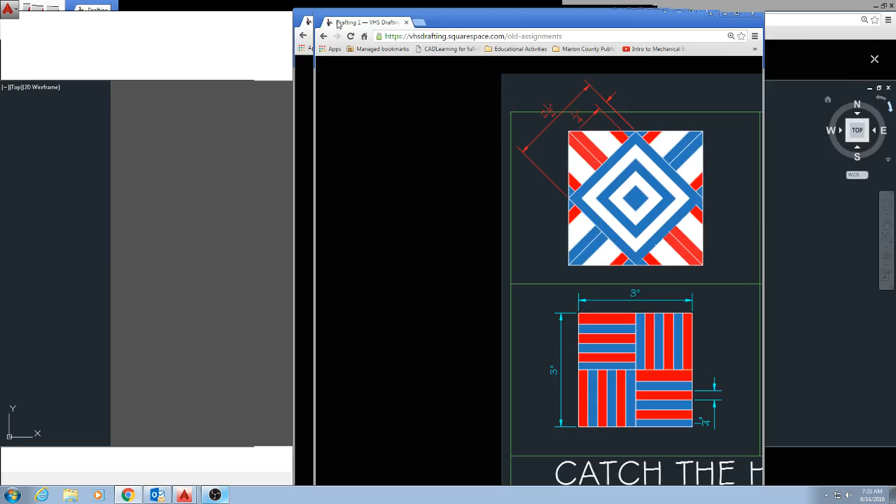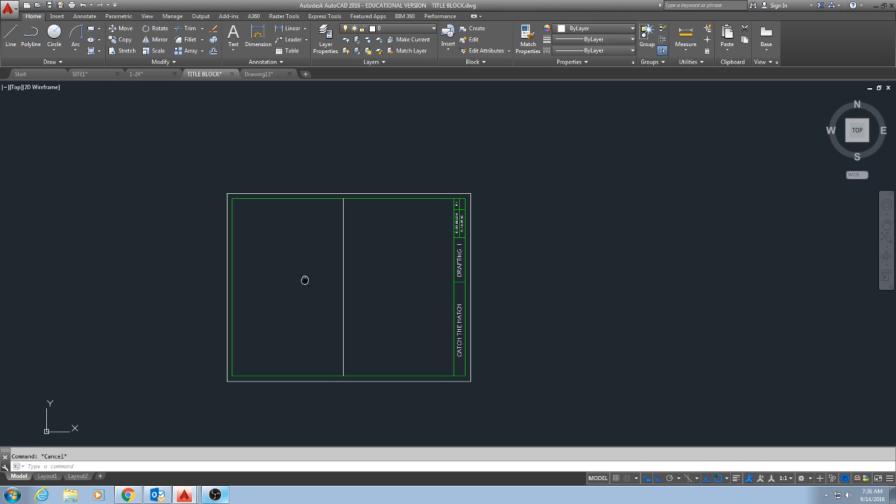I'm going to pull this to the other screen. First I need to divide my border into 4 sections. I'll click my green line on top and slide it over so I can cut my drawing space perfectly in half using midpoint. I'll draw a line straight down and trim it off, then reconnect this. And I'll do the same from the left, go to the midpoint straight over to there.

Let's see, you can use match properties. That's a new tool. Match properties allows you to take the properties of one line and apply it to other lines, so you can easily change colors and properties, stuff like that.

Okay, starting in the top left corner, the drawing tells me that I have a diamond shape that's 2.5 on each side.

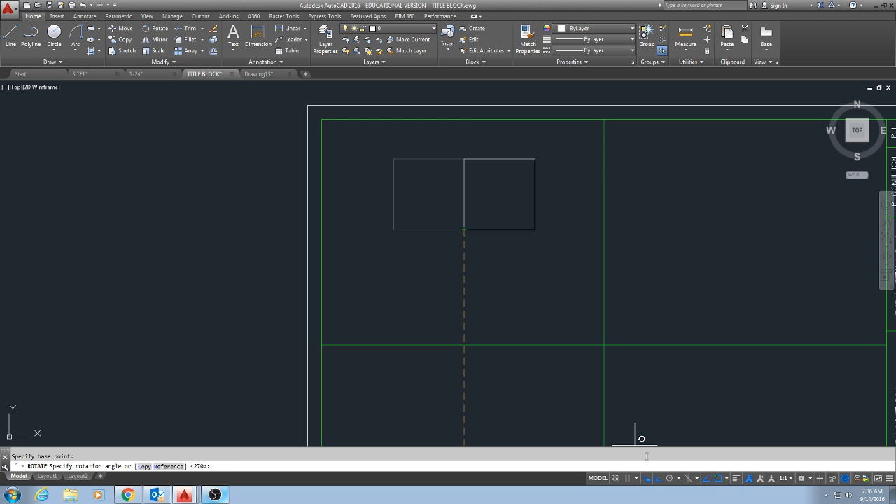So I'm going to start by drawing a 2.5 by 2.5 box, and then rotate it 45 degrees, so we've learned rotate. I'm going to rotate it from this base point, turn ortho off, and I need it to go basically into a diamond shape like that. So I've got a square and I need it to go there. If I went all the way to there, that would be a 90-degree rotation, so I want to go half that distance. When it says specify rotation angle, you can just type in how far you want to rotate it in degrees. So here I'll just type 45, enter, and it actually rotated it to the left, not the right, but it's okay, it's still the same thing.

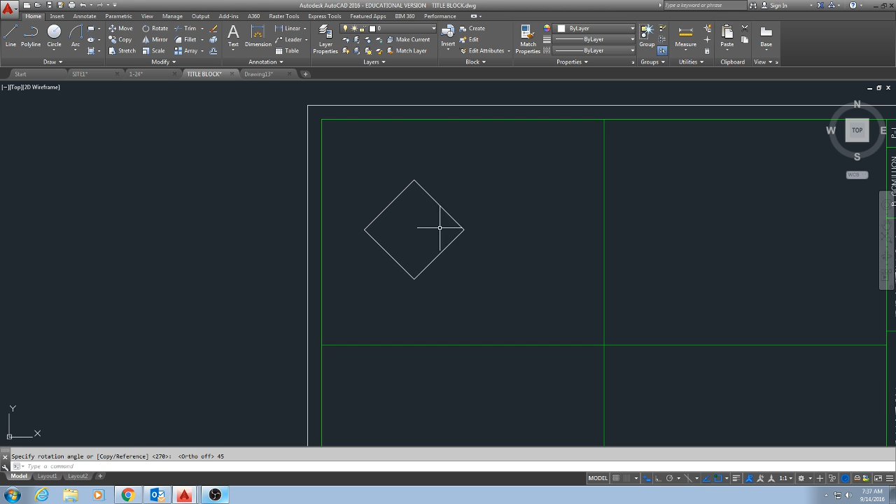Alright, so there's my diamond shape, and then there's a box surrounding the diamond shape. I don't know how big this box is, but I know it has to basically touch this diamond. So I'm going to draw a box like this, and then extend these lines so they're a little longer. Like that, and then TR, enter, and trim the corners.

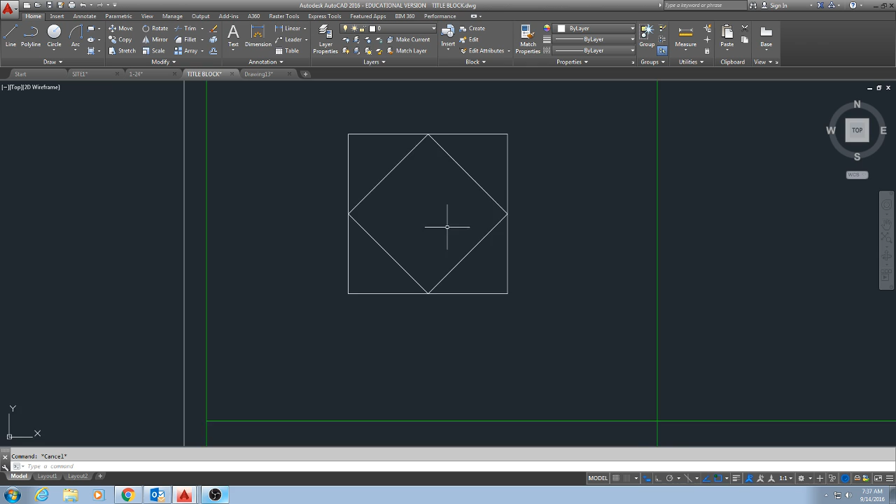Okay, and then you have offsets of 1/4 of an inch of this diamond going in. So I'm going to hit the offset tool, 0.25 is 1/4, and then I'm going to come in, and I can keep coming in.

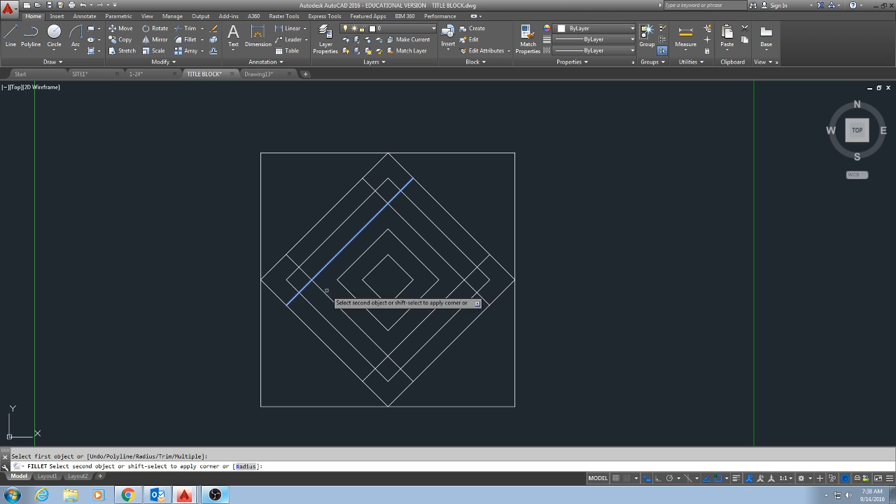Hopefully it doesn't get too confusing for me to trim it. We'll see. I'm going to use the fillet tool, which is here, and just fillet the outside. Then I'm going to the inside because it's easier for me to see. I'm just doing fillet over and over—you just got to make sure you click the right lines, just the lines that go together.

Alright, and then we get a shape that looks something like that. And then there are lines that come from the corner to the midpoint like this on each corner, and those also have an offset of 1/4 of an inch, so I'm going to offset those.

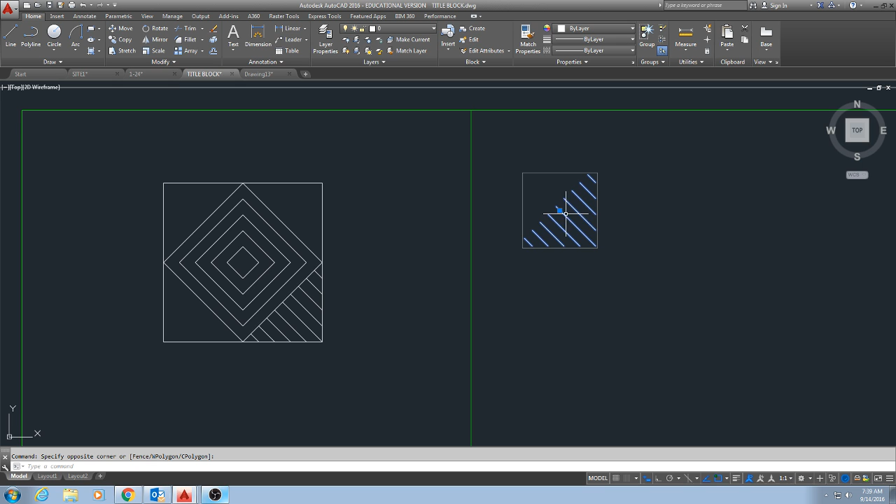And trim. Actually, I need to do that for all 4 corners, but what I'm going to do is use copy paste. So I'm going to select all these lines down here. Control C for copy, and then Control V for paste. And I'm going to group these by right clicking and going to group. Now they're all together, and I can use the rotate tool with ortho on and just rotate them whichever way I need them.

And then copy them over to there. Now that I have them here, here's a new tool, mirror. Actually, I need to group these together as well—I guess I don't really need to, but let's see if I can. Group, group, so now I have 2 groups. I'm going to click both of these and then use the mirror tool up here.

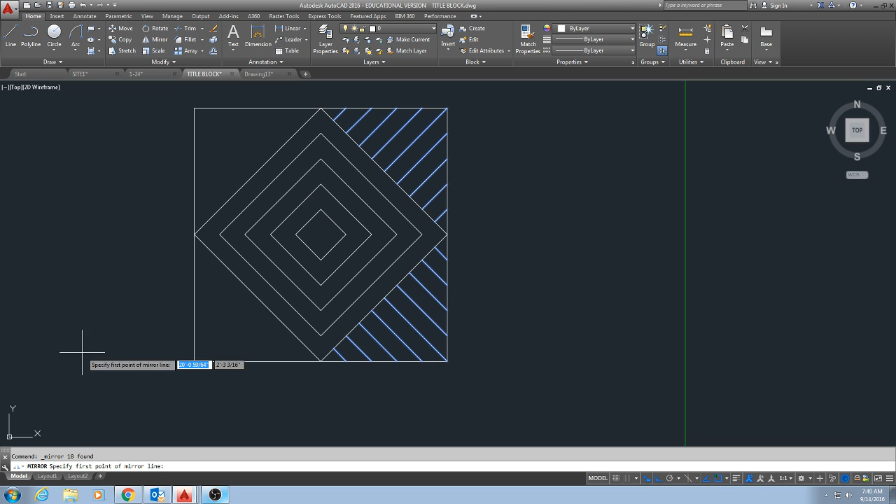It'll say specify first point of mirror line. That's going to be the top of my diamond, and then the second point will be the bottom of my diamond. Erase source objects, no. And now my pattern is complete.

Okay, that looks good, and then I just have to hatch the colors. So the hatch tool is here, solid. Let's find a nice blue and just gotta follow what the website says here for the colors. So there's that, that, and that, and then these two, these two.

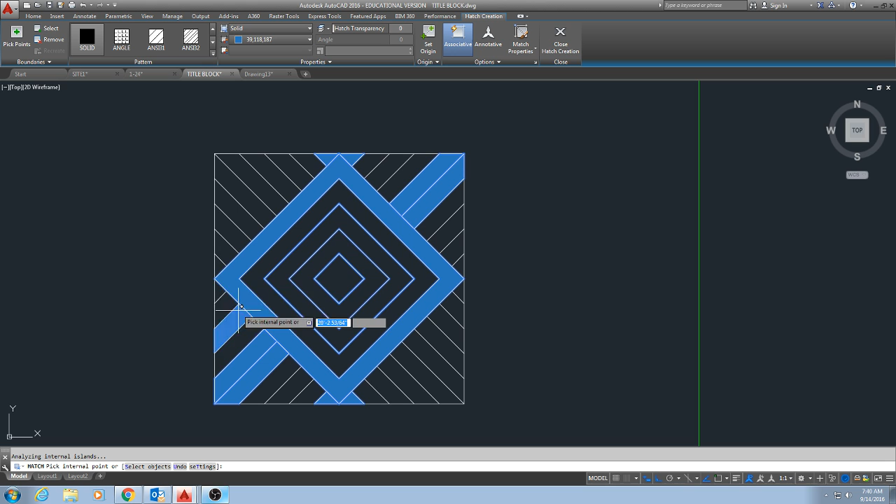Alright, that's all the blue. I'm going to do hatch again, except change the color. I could change it to use this white here, not this one—if you put it on this, it won't get printed, so use this white. So I've got a double white there, double white there. That's red, white, white, white, white, white, white, white, white.

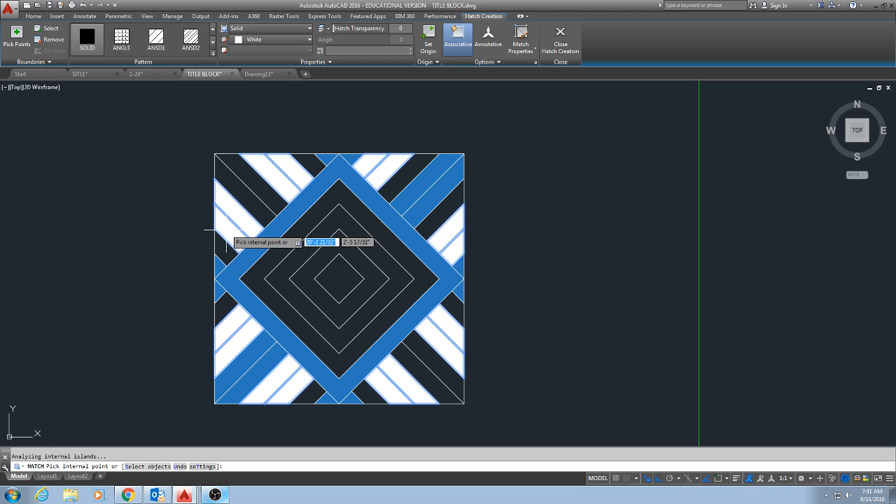Hopefully I don't mess anything up. Oh, my blues disappeared. Sometimes that happens and you have to rehatch, or hatch in a different command. I don't know what blue I used—hopefully it was this one.

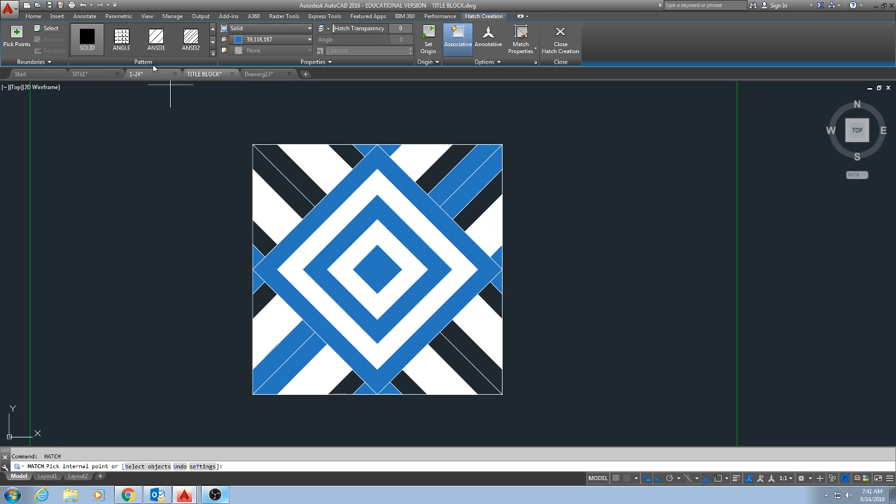Alright, all the other ones are good, and the last hatch is red. So you can do them all together just by clicking like that, or you can do them individually, like hit hatch, then click, then hit enter, hatch again, click, enter, hatch again, click, enter. Sometimes you have to do it where each individual section is a hatch if it isn't looking right.

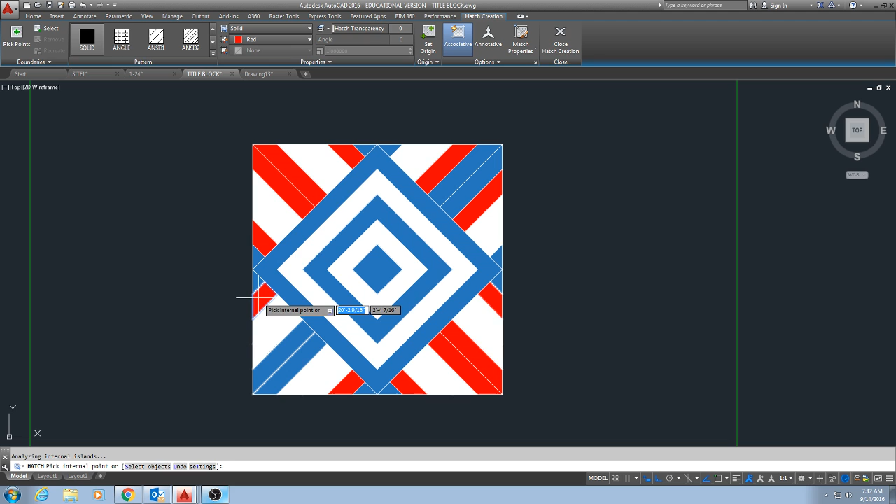Alright, there's that shape. Go ahead and center it. And I think this is a scaled border, so I'm going to double click the top line. Yes, it is. So I need to scale this down by 0.5 so that this fits more nicely in there.

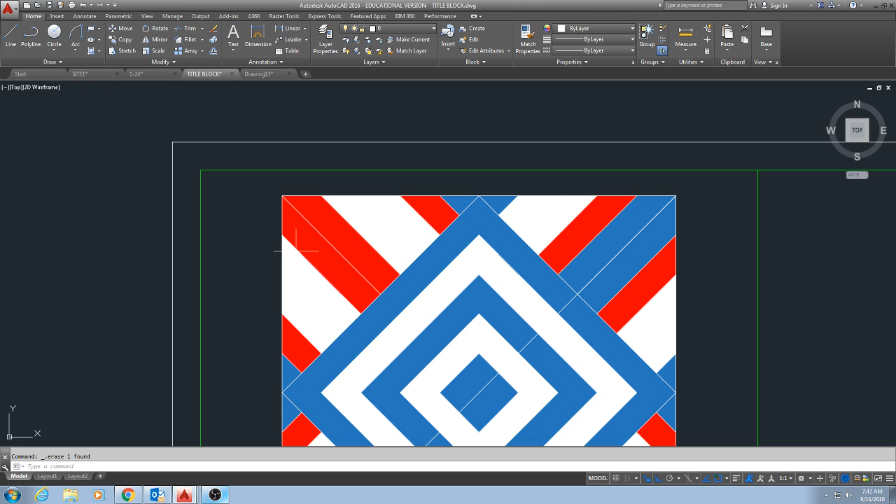Let's make a new line going across so I have something to snap onto there and move it in there. Okay, and then erase that. Is this 2.5? Let's do a dimension. Yes, it is. Looks a little tighter on this border, but let's see—hopefully they'll all fit. Okay, next one is over here.

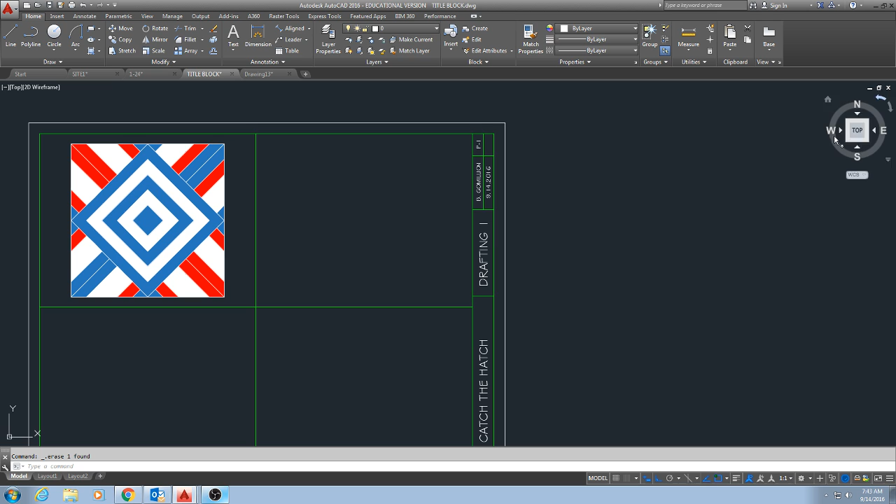I start with a rectangle that's 2 by 4. So 4, 2, 4—try that again, 4, 2. And then it has an offset of 3/8, so just offset this guy in. Use the fillet tool.

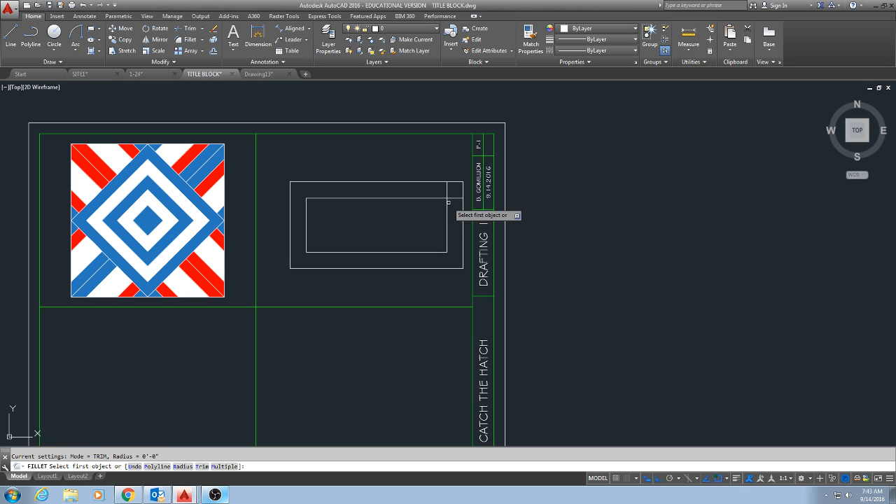Okay. I'm going to slide it out because it's not centered in there. Actually, let's go ahead and center it now.

Okay, so then there is kind of this diamond shape. And all I really know about this is that from the midpoint of this orange line is where this line starts, and this line goes at a 45-degree angle each way. I know I don't tell you that on here, but I'm telling you on the video.

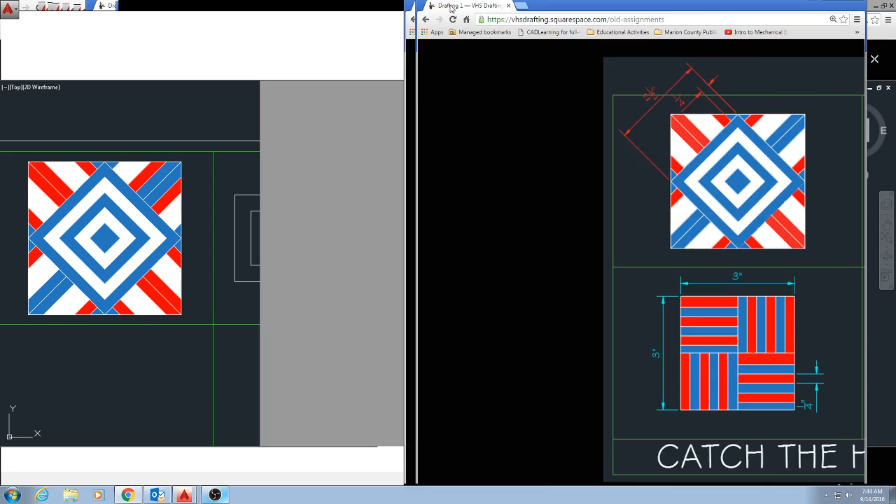So to draw a line at 45 degrees, I'm going to show you a new tool here—it's probably been on the whole time for you. It's called polar tracking, and the icon's blue, which means it's on. It just snaps onto certain angles. By default, it's set to 90, so every 90 degrees it'll show a green line like that.

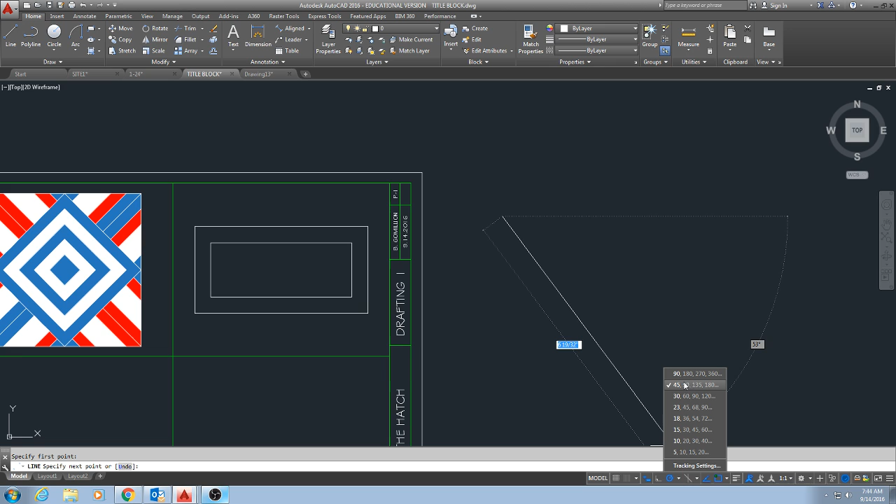But you can also set it to other angles—like I've got mine set to 45, so that means every 45 degrees you'll get a green snap line. So as I move my mouse up and get closer and closer to 45, once I get there, it'll snap.

So how I'm going to use that is by drawing a line from the midpoint here, then go straight up at 45 and just click. I don't know how long it is, I just basically clicked it. And do the same on the other side and click. Actually, this is supposed to be on the bottom, sorry—so come from here and then go that direction and click. Same on the bottom, and then that same thing happens up here. Wherever they meet, that's where your diamond shape's going to be.

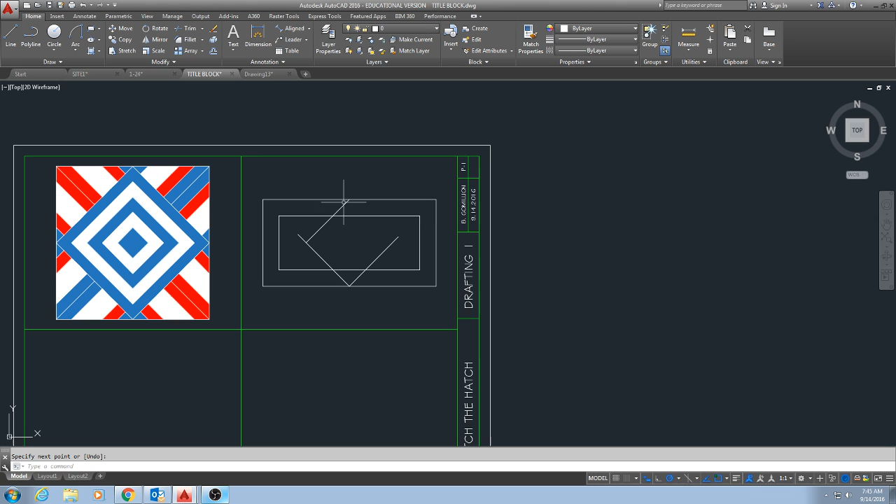As long as you have object snap intersection on, whenever you get there, that little X, the green X symbol, represents intersection, and that should be on by default here. But if it's not, you can turn it on in your object snap.

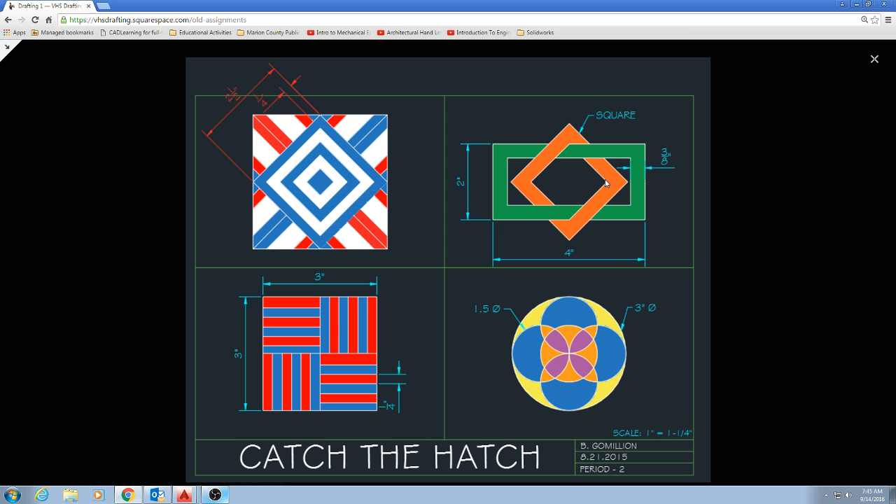Okay, so let me make that again, and then I'm just going to trim these lines. So that represents basically this inside section of the orange diamond here. And then it also has an offset of 3/8, so I'm going to use offset 3/8 and just offset it out.

And then use the fillet tool to fillet the corners. And then all I have left to do is trim what's not supposed to be there.

So hit trim, then enter. This goes away, this goes away, this goes away, this goes away, and these two, and these two. So that way it kind of looks like you've got the boxes intersecting or intertwined with one another.

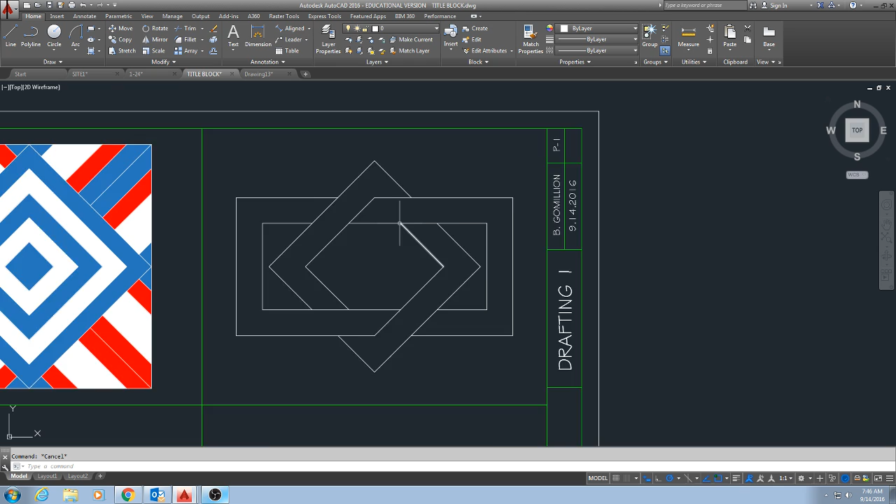And then you're just going to hatch. One is orange, pick a nice orange here. And the other is a green. How about that?

And that's that shape. I'm going to include the dimensions real quick while I'm here. Use a linear, let's go there to there. Okay, I'm kind of running out of room.

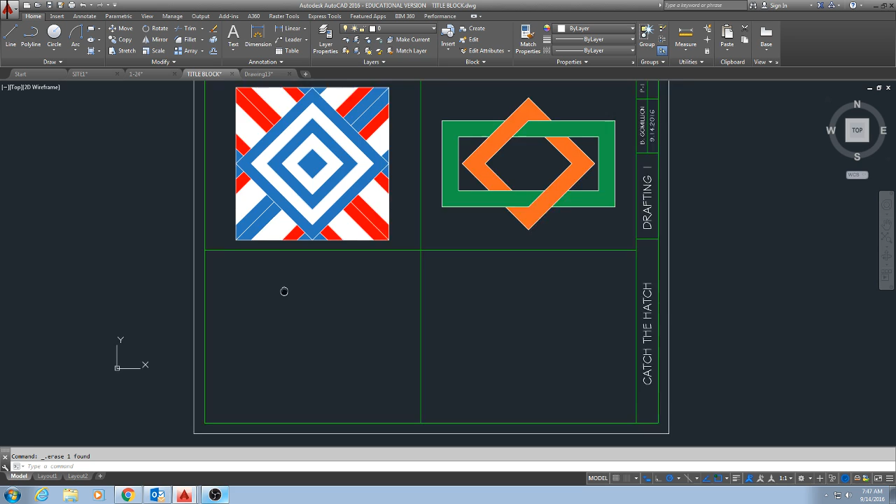Alright, let's cancel the dimensions. I'll come back to those later. Last shape is down here.

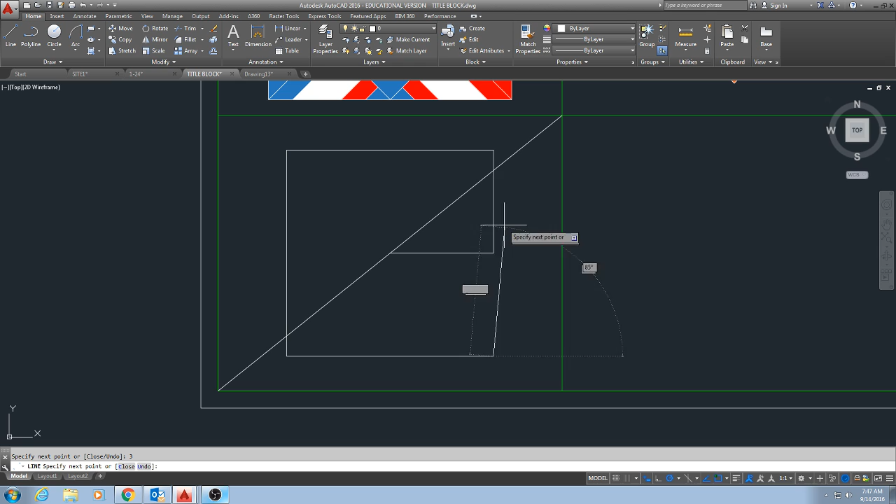Let's start with it already in the center. So it's a 3x3 box. So if I start from the midpoint and go out 1.5 inches, then I can just go 1.5 inches up, 3 over, 3 down, 3 over, and then another 3 up, and then erase those.

This section, or this square, is just divided into 4 parts, like that. So you just use the midpoint, and then you just offset 1/4 inch based on what the pattern is.

So I'll do this one first, and actually I can go ahead and do multiple and come all the way down. And then trim, I'm going to trim these. Hope that's enough. There we go.

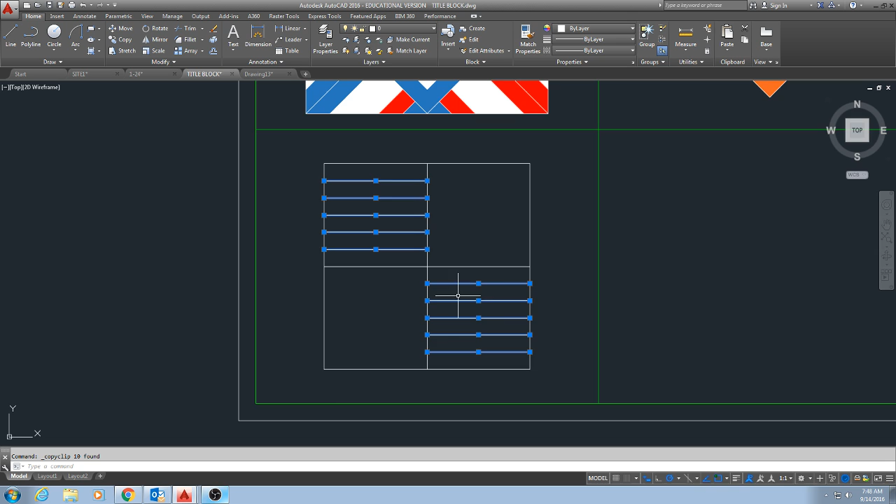Trim both of those sides so that you're just left with the pattern there and there. And then if I want to get real crazy, I can take these lines, copy, paste them over here, and then rotate them.

Let's go ahead and group them. And I'm going to put them here because I don't have anywhere to snap right there. If I snap there, it won't be right.

I'm going to put them there and then use the move tool because they're not in the right spot right now. I could offset another line, but I already have the line sitting right there, so I'm just going to use the move tool. And here's one way to use the move. You can just click anywhere out here and move it in the direction you want to move it.

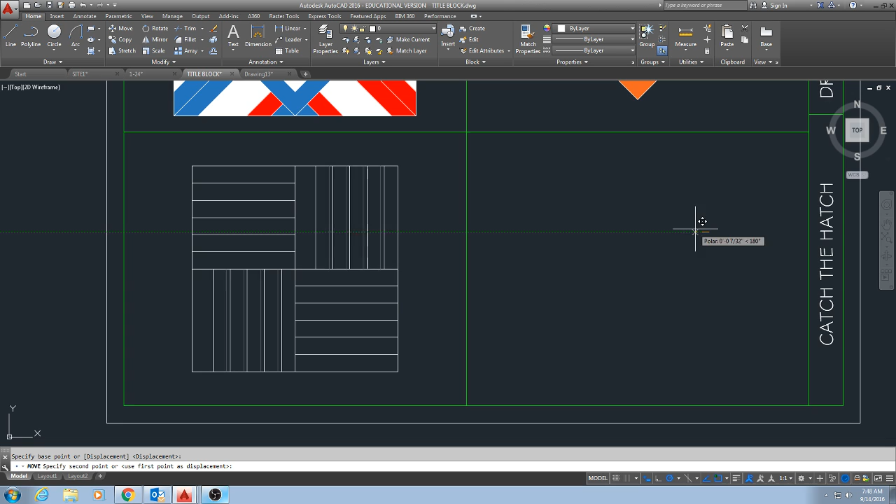I know the space in between is supposed to be 1/4, so if I move this set of stuff over 1/4 inch, then it'll just slide it over however far.

Like, for example, if I have a line right here, this is basically what I just did. I had a line or a group of lines, and I hit move. I clicked. If I want that line to move over 2 inches, I can just type 2, enter, and it'll slide it over. So I did that with the whole thing.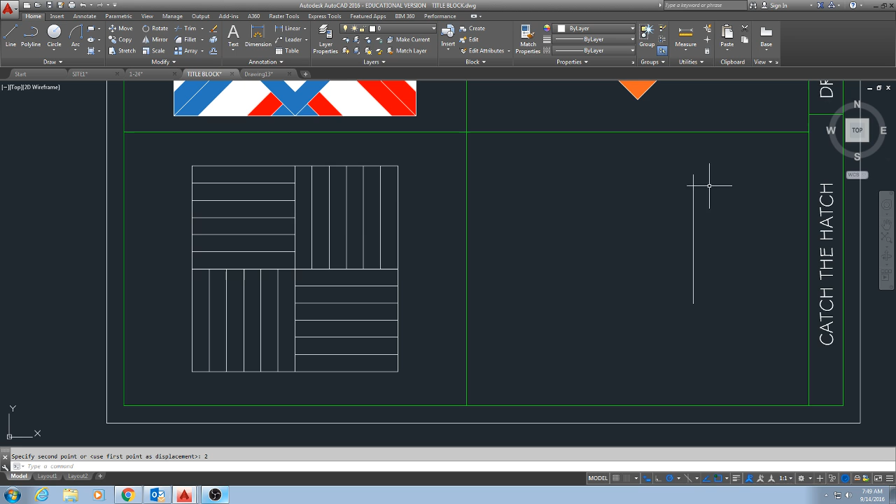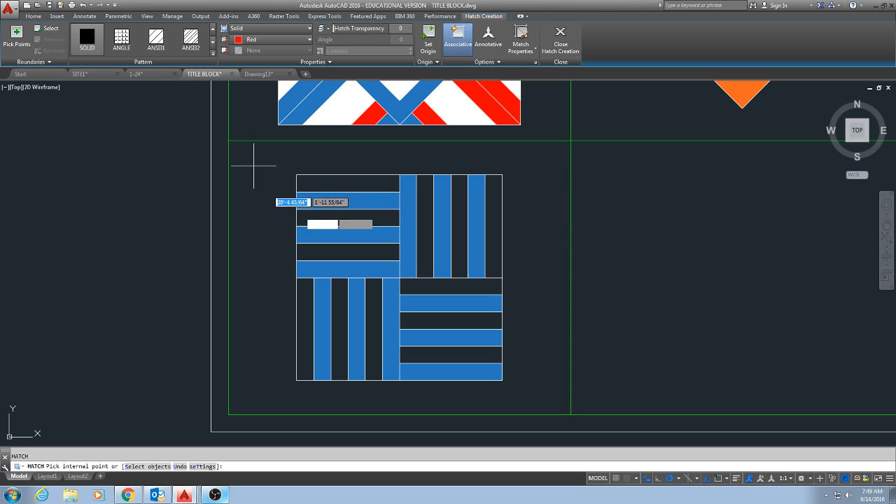And then I'm going to use hatch. Get the blue right here, here, and here. Here, here, and here. And then the red. Okay, that's that.

So last one says, let's see, start off with a circle that has a diameter of 3. So I'm going to draw a line here so that I can put my circle directly in the middle of my little box here. And I'm going to use the circle diameter tool, not the radius tool.

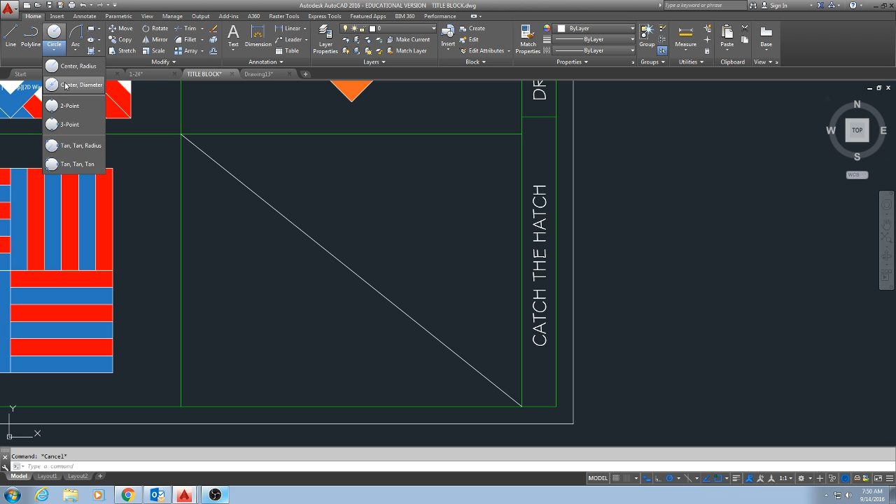You could use the radius, but then you just could type 1.5. But if the drawing says, you know, whatever the diameter is, I always just use the diameter tool. Click there, type in 3, enter. Now I've got my circle.

And let's see what happens now. The next part is I have a circle that basically comes from here to the center. So let's try this. There's also a 2-point circle, so it creates a circle using 2 endpoints of the diameter, meaning, let's see if this will work.

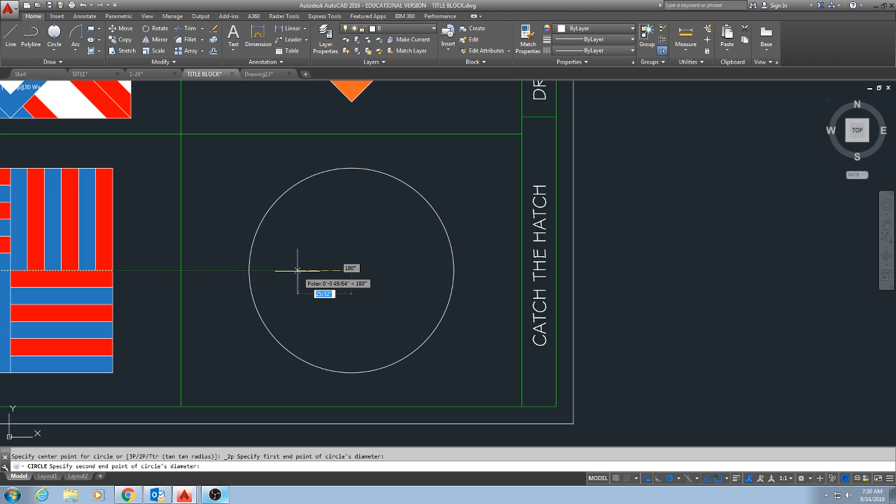If I come from the center and out there, that's kind of like this blue circle here, if I can show you on the screen. It goes all the way in, and then I need to do that a couple more times. So use the snap point for the center, go there, same thing, there. Oh, gotta click on that.

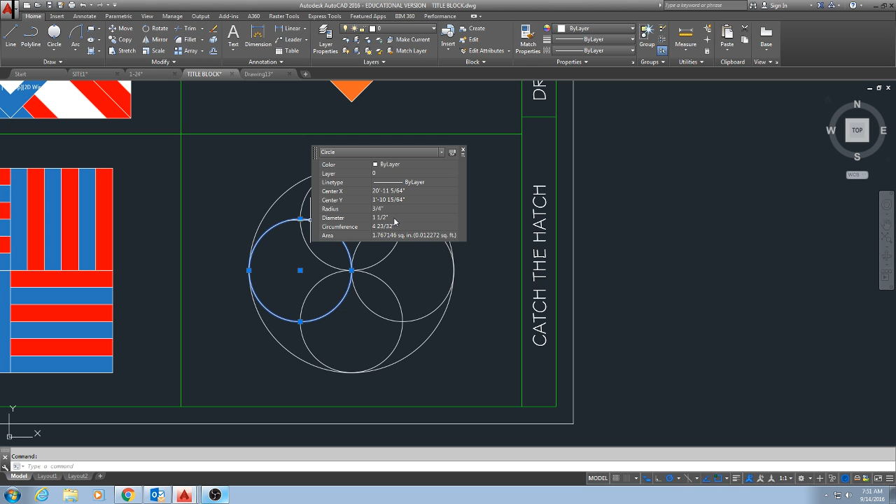So those are the big ones. It says these have a diameter of 1.5, which I just checked and they do, so that's good. I'm going to assume, because there's no other notes, that this circle is also 1.5. Let's see if that's right. Let's do circle center diameter 1.5. That looks right to me.

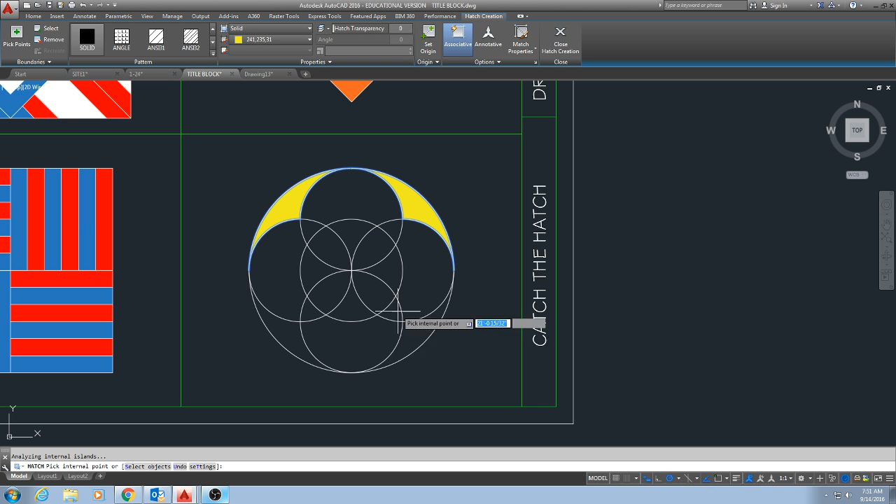I'm going to use the hatch tool. Choose my colors. It looks like a yellow going around the outside, and then a blue, then I got some purple, doesn't look like magenta though, and then an orange everywhere else.

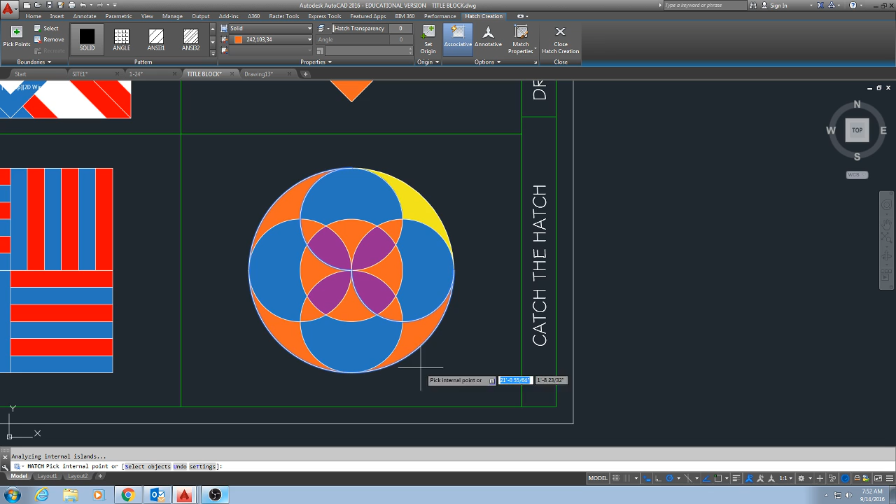Oh, there we go. Oh no, it hatched all these. Okay, so sometimes this happens, like when I was hatching this little corner right here, it happened to hatch all this stuff around the outside.

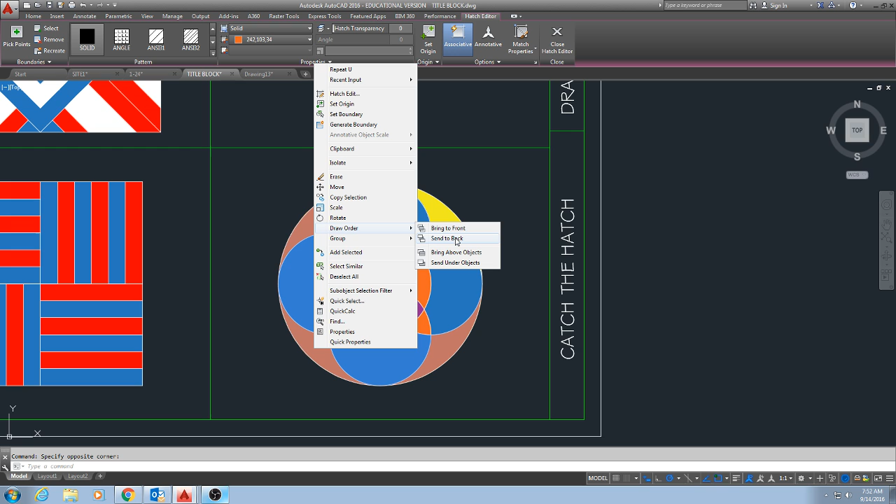You can click on this and then right click and go to draw order, send to back, and what that'll do is take that orange hatch and push it to the back of the drawing so that it's still there and still shows up here, but the yellow hatch is on top. So if I clicked on the yellow hatch and deleted it, you'd see the orange underneath, but sometimes you can't help but hatch things on top of each other like this. So let me hit send to back again like that.

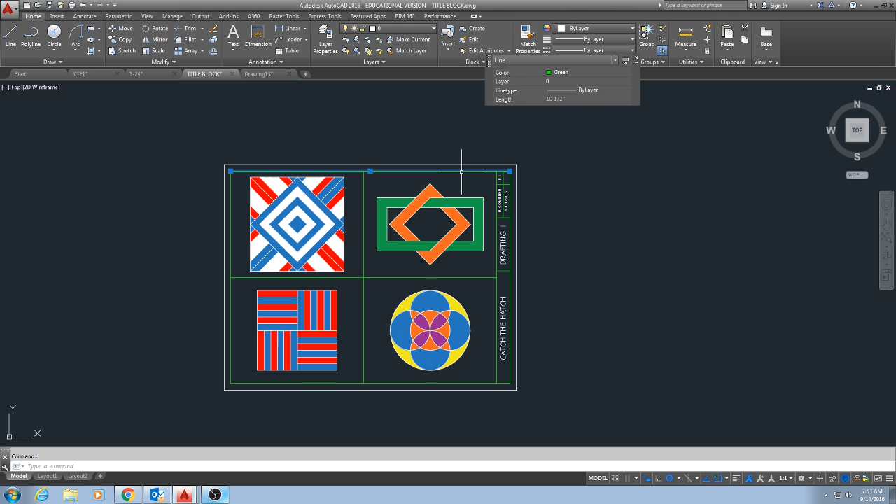Okay, so that's all of the drawing section. I think we need to do the dimensions, but they looked a little tight. The reason why, I think, is because we're using a different title block than I used last year. So let's see if I can get this to work.

Let's do a linear dimension from here to here. Okay, I need to make my dimensions a little smaller, and here's how I'm going to do that. Let me put this one up here too.

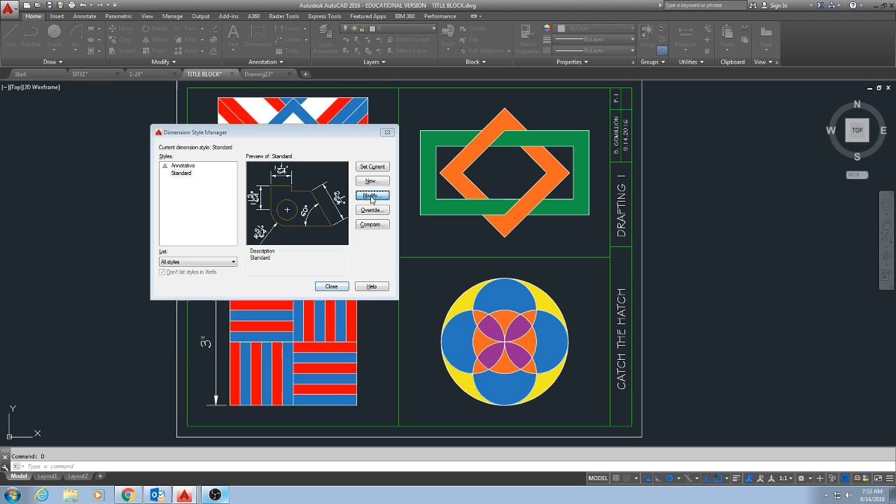If I hit D enter, which is dimension style, and then go to modify, under fit right here, there's a thing that says use overall scale of, and mine's set to a little larger right now. By default it's 1, but you can also make it smaller, like maybe 0.75. Let's try that. What that does is it scales all the parts of your dimension down so they fit nicer in smaller drawings like this one. So I think let's try that 0.75.

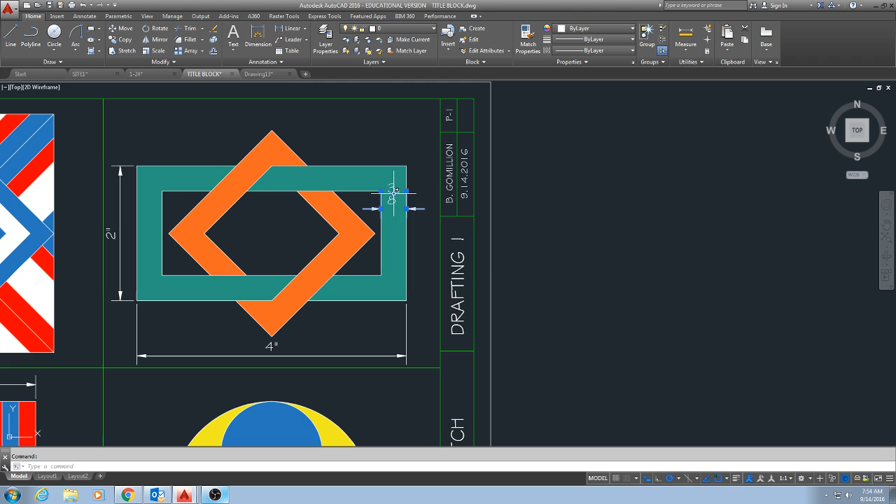Let me fill out the rest of my dimensions and see if that's going to work. Hopefully it does. Looks like I'm running a little tight on room there, but it fits. And then maybe a 3/8 here if I can get that to fit. Let's see if I can bring that out, and then a little closer.

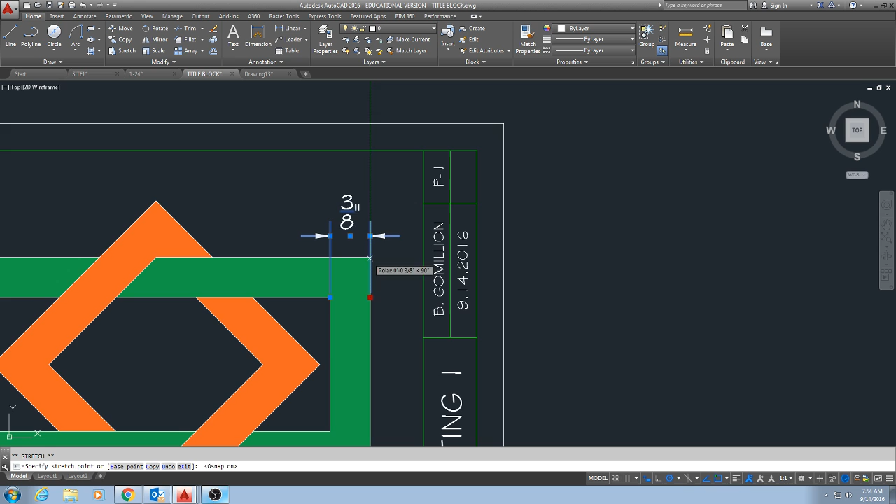Well, that's not moving. Why not? Looks like it has to be inside there. Let's actually just move this up, just because we've got room up there. Move that dimension so that it looks something like that. That'll fit. Don't need any dimensions on these because they would go outside the border, since they're all at angles. Just need 2 more over here.

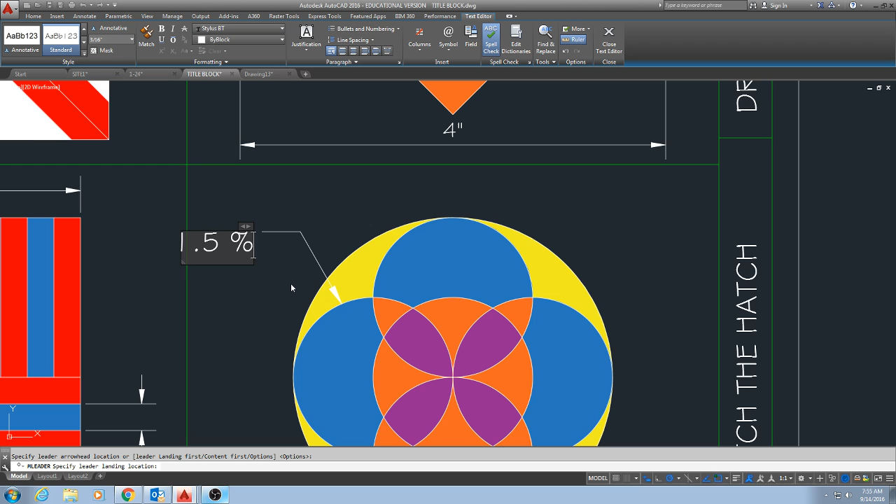Let's do a leader line. I'm going to turn object snap nearest on, and let's see, I give a dimension for this, so I'm going to click there. 1.5. To write the diameter symbol, you type in %C, and when you type that in, it'll change what the symbol looks like to that.

Okay, let's move that over so it fits a little better. And I got one more leader that goes here, and this says 3-inch diameter, so that's %C. Click out there somewhere. Okay, and that's all the dimensions that I need.

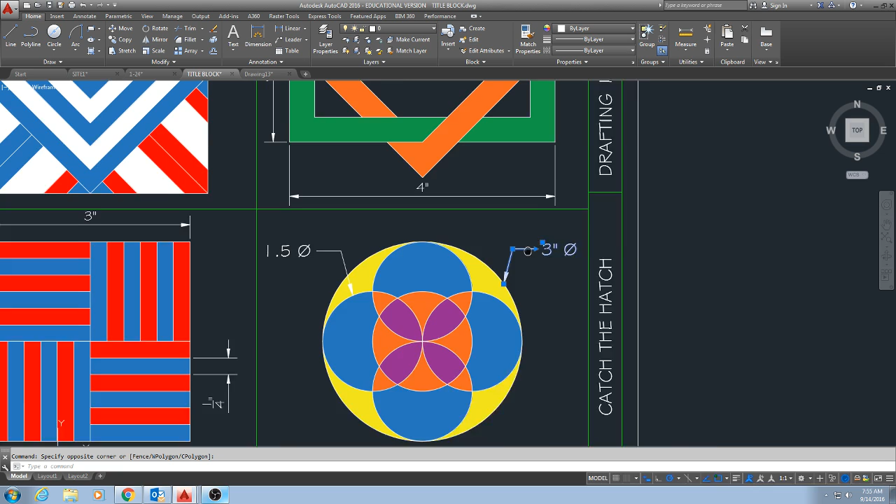I'm going to change the color of them to cyan. Catch the Hatch, drafting 1. That's today's date. I think that looks good.

Oh, I forgot one dimension. The thing up here that points that says this is a square. So leader line, let's do it here. Looks like I have more room over here. Just says square, that's all. And then put that on there. And that's it for the Catch the Hatch drawing.